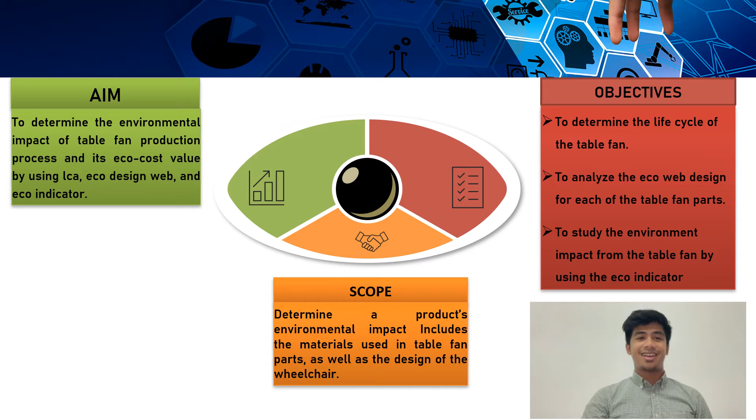Today I'm going to talk about the literature review of this project. Our product that is being chosen is the table fan.

The first author is Hartini. From Hartini's statement, it states that the design of the product will affect the subsequent stages such as material requirement, energy consumption, and the manufacturing process. The next statement states that in Indonesia, the fan is the electric appliance with the highest usage among other electric appliances. The last statement from Hartini states that the table fan is an electrical appliance that will generate many environmental impacts compared to other electric appliances.

The next author is Xiaohang Jin. Xiaohang Jin states that thermal-related problems are the common cause of electronic product failure, and the reliability of electronic devices is dependent on the fan's reliability.

Next is Qanvast. Qanvast states that the fan is a must-have item in any Malaysian home. After that, the table fan is also the most effective way to promote ventilation among other electric fans, as it will be near an individual person when they are currently using it. Besides that, the ceiling fan is proved to produce more air in a broader area than the table fan. The last statement from Qanvast is that the stand fan has the easier cleaning alternative, as the height and position of the table fan is much more narrow and not as high as where the ceiling fan is located.

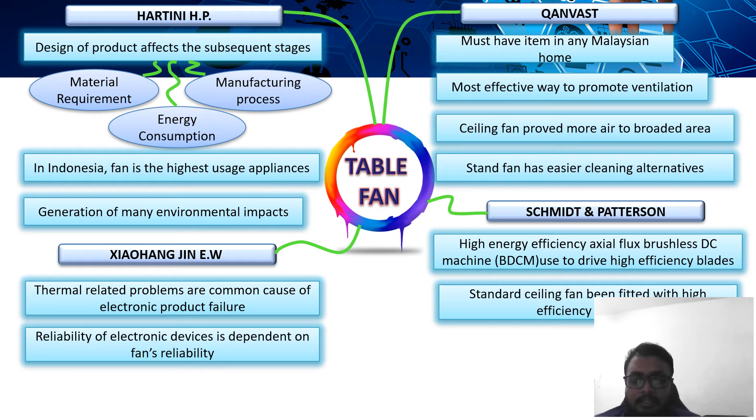From the next authors, Schmidt and Patterson, it states that a high energy efficiency axial flux brushless DC machine is used to drive high efficiency blades. Next, the standard ceiling fan has been fitted with higher efficiency compared to the table fan.

From the author named Tamminen, it states that fan systems account for roughly 10% of total electricity usage from all appliances. The next statement from Tamminen is that the life cycle cost of the fan system can be greatly lowered when the variable speed drive is adopted in the table fan.

The next author is Saurabh Gupta. Saurabh Gupta states that electric fans help mitigate negative health impacts from heat waves, and the fan's goal is to increase heat loss by improving the efficiency of regular heat loss techniques.

From the author named Naiju, it states that companies all over the world are reducing their costs and enhancing their profits, and designers utilize Design for Manufacture and Assembly (DFMA) to study the possibilities of activity-based costing, modeling, purchasing, and manufacturing processes, giving valuable information.

From UK Essays, it states that the usage of polymer and small-size strong motors could make the fans lighter, and the common household appliance used for cooling at this time is the table fan.

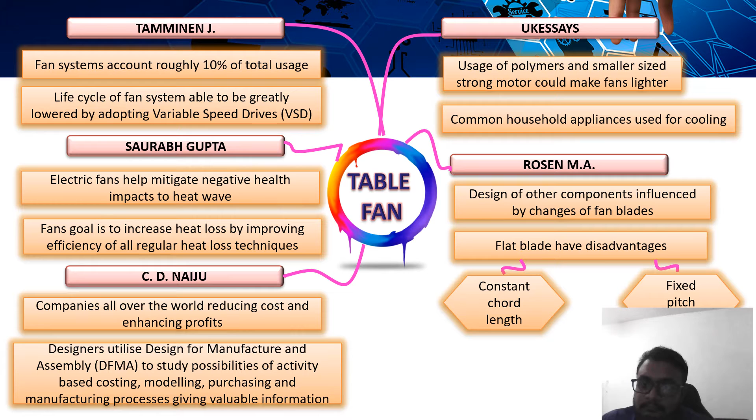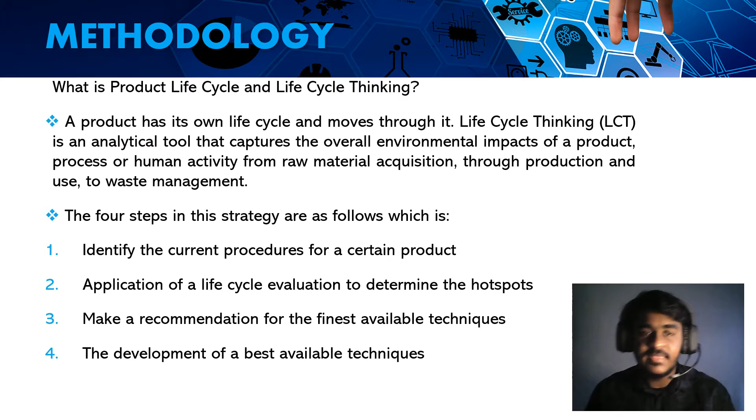So basically, what is product life cycle and life cycle thinking? A product has its own life cycle and moves through it. Life cycle thinking is an analytical tool that captures the overall environmental impacts of a product, process, or human activity from raw material through production and use until waste management. There are 4 steps in the strategy: identify the current procedures, apply a life cycle evaluation, make a recommendation for the finest available techniques, and develop the best available techniques.

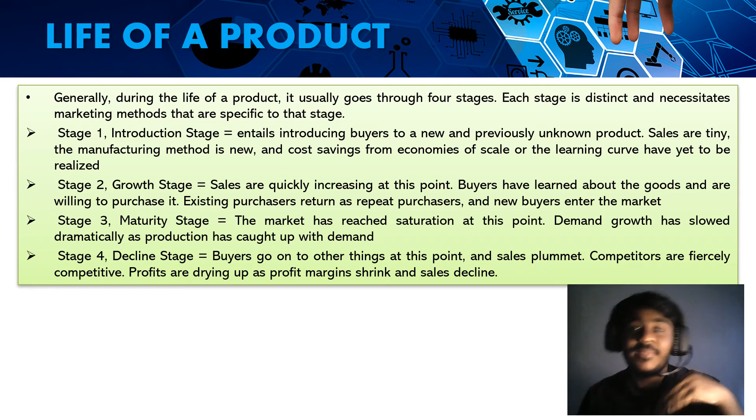All right, the next one, eco design web. This is one of the methods we use in this assessment. The eco design web is used to examine the eco properties of the components of the chosen product, which in this case is a table fan. There are 7 factors uniformly dispersed in a circular web. A linear scale from the center to the perimeter is calculated for each parameter. The grading of sustainability can also be based on the color code that reflects each scale, with red indicating extremely terrible and green indicating very good on the outer layer of the circle. The color scheme shifts from red to green gradient by gradient for each layer. Using this grading system, each parameter is evaluated independently in relation to the other 7 parameters. Materials, products, and services can be compared using the web area produced from the periphery points corresponding to the grades of each criteria.

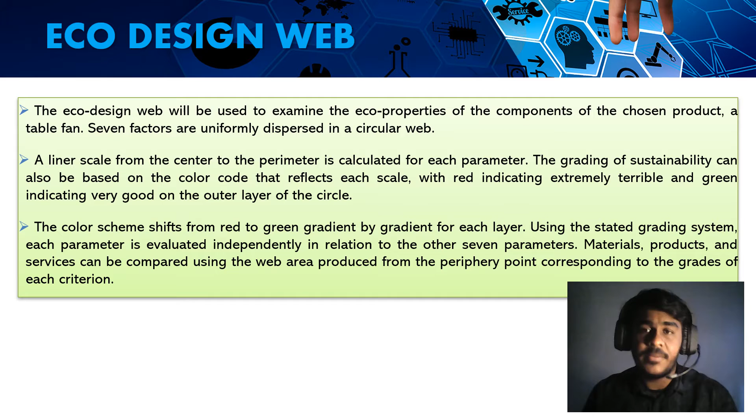Okay, the next one is the eco indicator. The eco indicator is a useful tool to determine a product's environmental impact - what does it bring, how does it impact the environment. This is to ensure a proper implementation of the eco indicator. There are actually 5 stages that need to be followed.

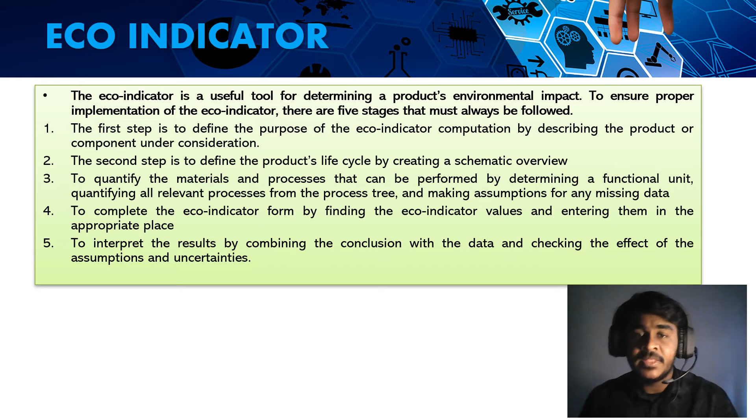The first step is to define the purpose of the eco indicator by describing the product or component under consideration. The second step is to define the product's life cycle by creating a schematic overview for us to know. The next step is to quantify the material and process by determining a functional unit, quantifying all relevant processes involved from the process tree, and making assumptions for any missing data. The fourth step is to complete the eco indicator form by finding the eco indicator values and entering them in the appropriate place - we need to look for it actually. The fifth step is to interpret the results by combining the conclusion with the data and checking everything with the assumptions and uncertainties.

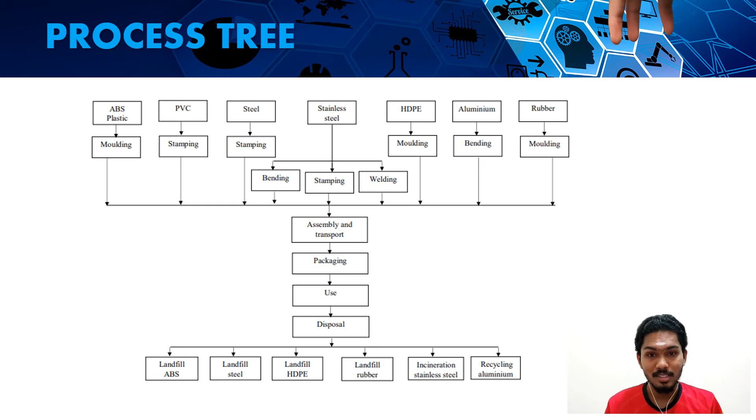Okay, let's look at the process tree. For the process tree, 7 raw materials were chosen for manufacturing the table fan. All those materials will undergo some manufacturing process for the next stage. ABS plastic, HDPE and rubber will undergo the molding process, PVC and steel will undergo the stamping process, while stainless steel will undergo a bending process, stamping process, and also welding process. So these are the main processes involved for the table fan. Okay, all the components are then assembled, packaged, and delivered to the user. After disposal or end of life, some of the table fan parts can be reused, recycled, or disposed to the landfill. Okay, there are many aspects to be covered in the eco-web design analysis.

First is material selection, material usage, distribution, product use, optimal life, and end of life, and also new ways of doing. Example of ABS material used for the table fan construction: fan blades, gearbox, oscillator, knob, decorative faceplate, switch, motor housing. For the PVC component, it is spinner; for HDPE, it is guard lock nut; for rubber, rubber feet; for steel, front and back guard grill and also the motor; the stainless steel material is for fixing screws and shaft; and for aluminium, it consists of body stand and also capacitor.

For the material usage aspect, a total of 15 components were analyzed for this experiment. The ABS plastic and PVC undergo the injection molding process, while steel and HDPE undergo the process of stamping.

For the distribution aspect, it looks great because you can buy the things via online platform, and also the table fan components can now be distributed by lorry, so it's an easier way.

For the product use aspect, it is eco-friendly because it can save energy and cost at the same time. For the optimal life, the table fan has a longer lifespan, high durability, and is easy to install or modify whenever you want to change.

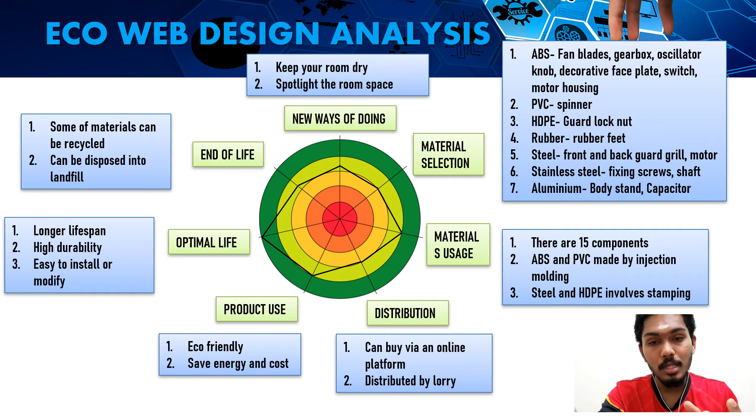The second highest score is for the production phase. This is because most of the components are made by aluminium, so the process to make aluminium parts, for example injection molding, uses the highest amount of energy during production.

The least score is owned by the disposal phase. You can also see negativity in the values because some aluminium parts can be recycled again for next usage. So that's all from me. Thank you.

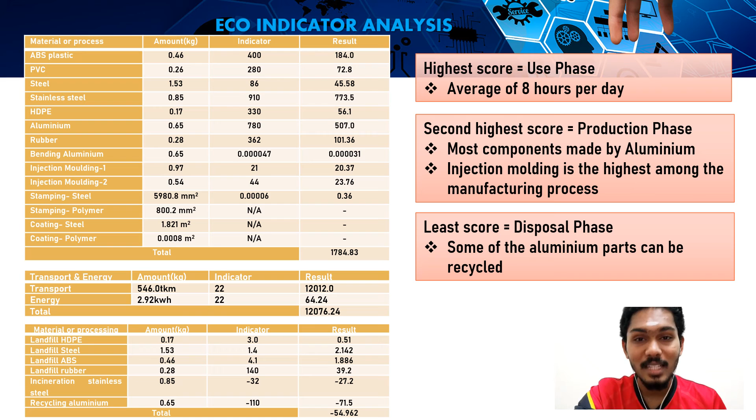The major areas of sustainability are society, economy, and environment. We made adjustments to the material selection of our table fan, switching to an eco-friendly material to accomplish the aim of the sustainable development concept, and extended the lifespan because the component material is coated to protect them from external threats.

Our primary goal of redesign is to develop the system, extend the life of the table fan, and minimize the amount of material needed. The strategy is to employ a design for environment approach and extend the life of the product by reducing the amount of material used and switching to a superior material.

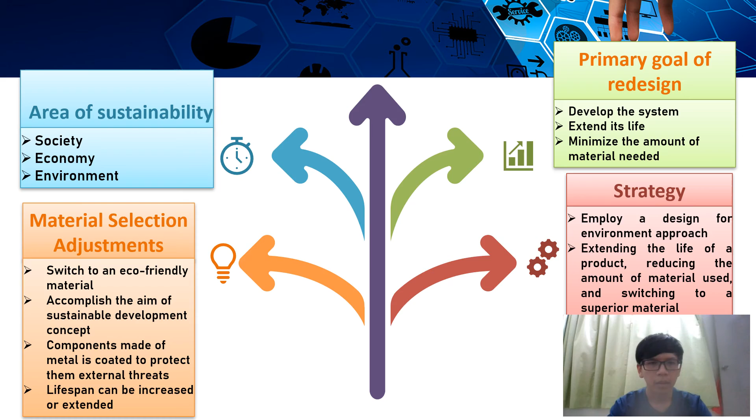There is a considerable difference in this discussion. We modified the dimensions of the components, reduced the amount of materials used, and changed the thickness of the stainless steel portion to a reduced thickness in order to save material.

There is a new material selection method for our table fan. In terms of function, objective, limitation, and free variables are among the design criteria. Aluminium and PVC were chosen as the new materials for suitability of usage. In the result, there is a lower eco indicator value and a better outcome. Thank you.

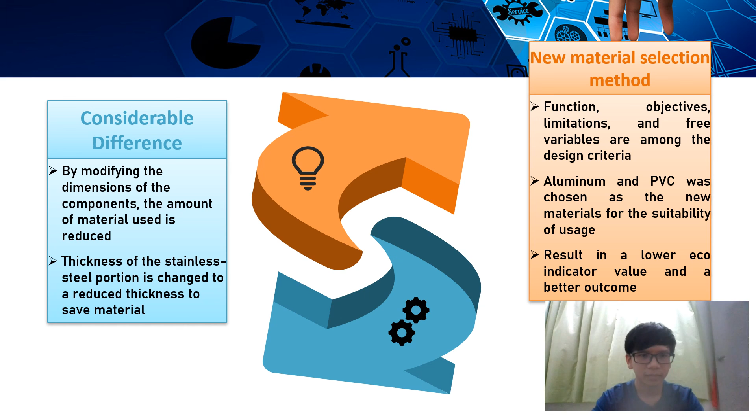The conclusion for our project: the aim of this project was to determine the environmental impact of the fan product process and its eco cost value by using LCA, eco design web, and eco indicator. The life cycle of the table fan was determined, the eco web design for each table fan was analyzed, and the environmental impact from the table fan was assessed by using the eco indicator studies. Thank you.